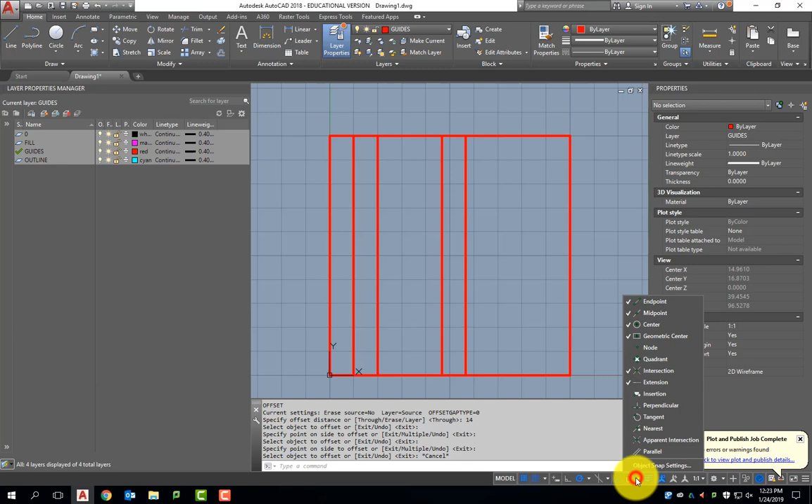You pick, you do it. I'm going to use my O-snaps because it's a midpoint. Yep, midpoint's on. Turn on my O-snaps, and I'm just going to say L, enter. I go from midpoint to midpoint, and then I'm going to go offset 1 unit to go up, like that.

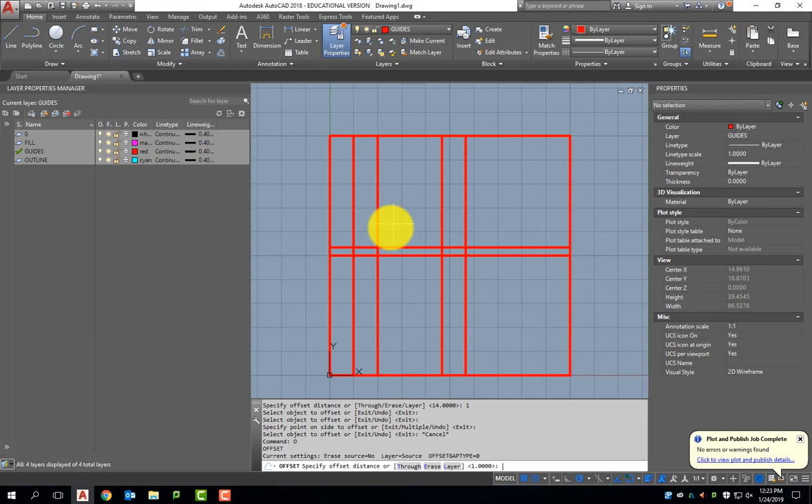And then, I've got 1 at the top too. I need to come down 1 from the top. So I'll set that offset again and go 1 down.

Doesn't look like an F yet, but it's about to. It's not good enough to be an F yet. Yeah. I gotta keep myself entertained or I get sleepy.

Okay, so I'm going to yellow out the 1, and the 15, and the 1. And what's nice about that now is all of my dimensions are figured out.

You can do the same. You can yellow those out. Yeah, go ahead and keep up with it so I can tell where you are. Did you get it? You didn't fill out the 15, so I don't know. Did you get it? Yeah. Cool.

So now any sketch you get, right, you see those red lines, you're like, ooh, that's work, I get paid. I can pay people by the highlighter. Every highlighter you use up is $1,000. How's that? It's about right, hourly.

By the time these dry out, you've done about $1,000 worth of work. Just don't leave it on your desk like this, get the lid off. That's called fraud or something. Okay.

Any questions about that? Are we good? Good. Everybody? Yeah. Okay. So now what's left?

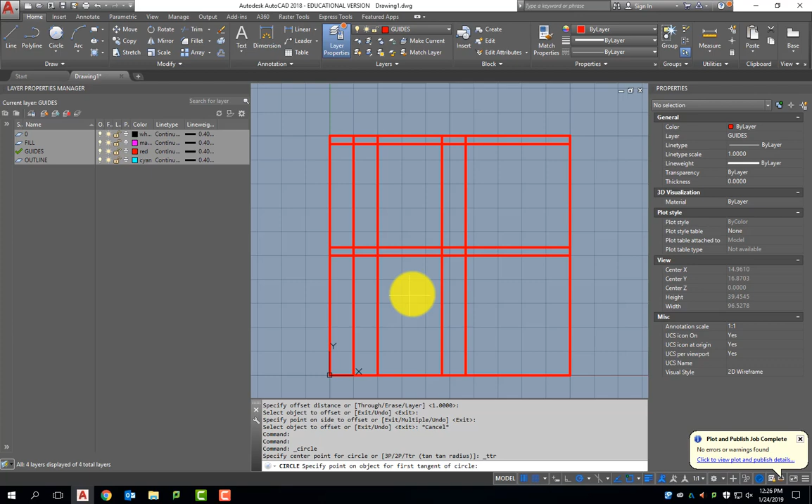Let's start down here at this inside corner right here. Okay? It's asking for what's called a deferred tangent. It doesn't know how big the circle is, so it doesn't know exactly where it hits. But it's going to be tangent to this line, and it's going to be tangent to this line. So I'm going to click this line and then that one. So here we go. I mouse on top of one, I click. I mouse on top of the other and click. And then it says what?

Specify radius. Do we know the radius? Yes. Then you can type it, 4.3, enter. See how that worked? Yeah. Okay, go do the others.

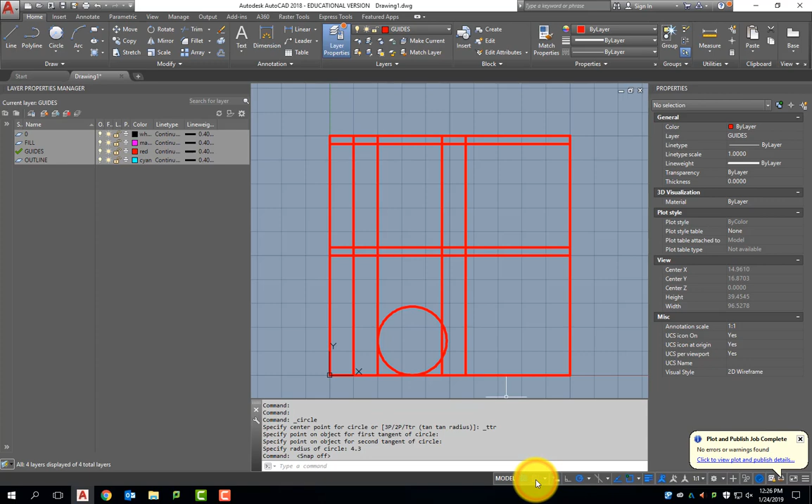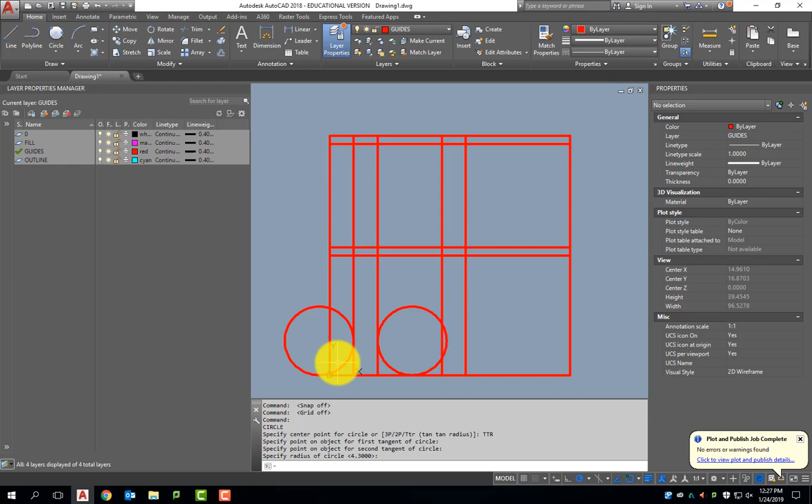I'm going to turn off my grid snap because it's in the way, and I don't need my grid anymore either, it's in the way. And I'm going to go ahead and draw the other circles. Enter. I got an option, TTR, enter. Click, click, enter. Go ahead and draw all the circles. As you draw them, yellow out so I can see when you're done. If you get one wrong, delete it, get it right.